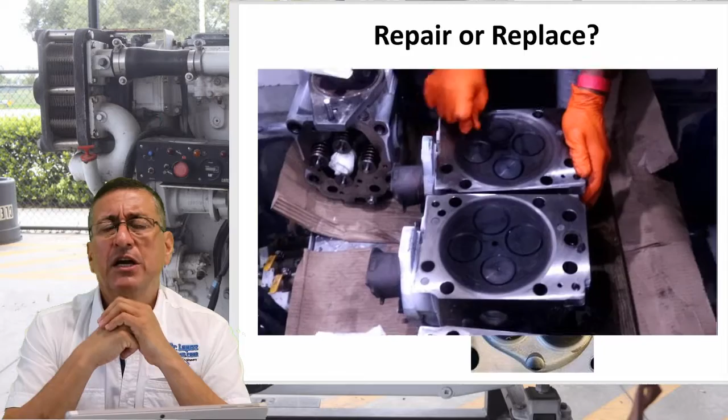Remember, I recommend you remove the head immediately. The first step is take pictures, of course, and then clean the head properly with mineral spirit or any other solvent at high pressure if possible, in order to remove all the grease. After that, check if the head is straight with a metallic ruler.

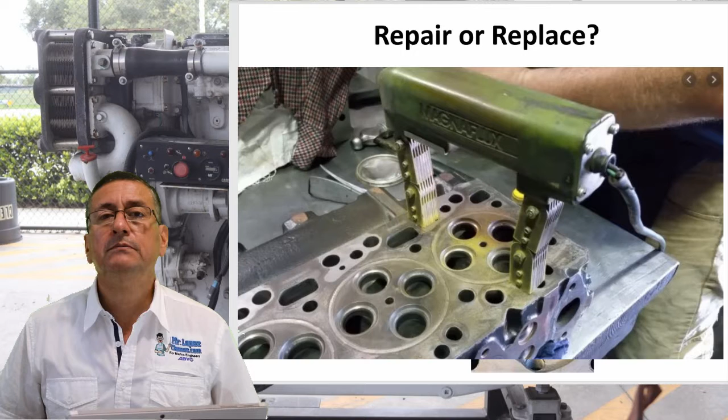After that, check with a liquid penetrant or magnaflux if the head is cracked or broken. If the head is cracked, normally when you send it to the machine shop they explain where the crack is located, and in some cases they recommend repairing the head.

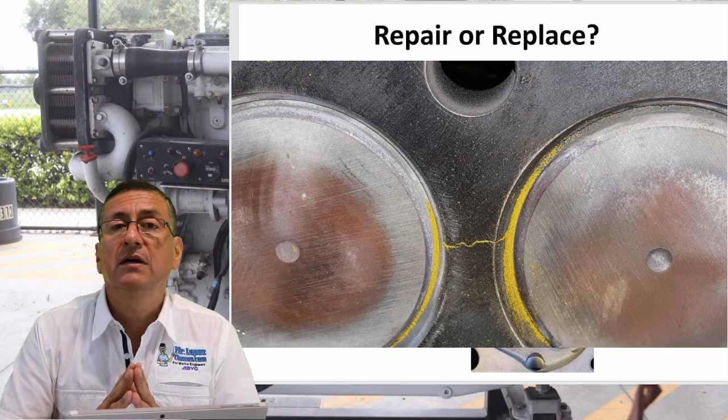In marine applications, according to my experience, I don't recommend repairing heads, especially for diesel engines. I don't recommend repairing heads in any type of engine, gas or diesel, marine application, because at the end of the day it's more expensive. In a couple of months you need to replace the head again. Avoid that inconvenience. Replace the head from the beginning. Don't try to fix the head.

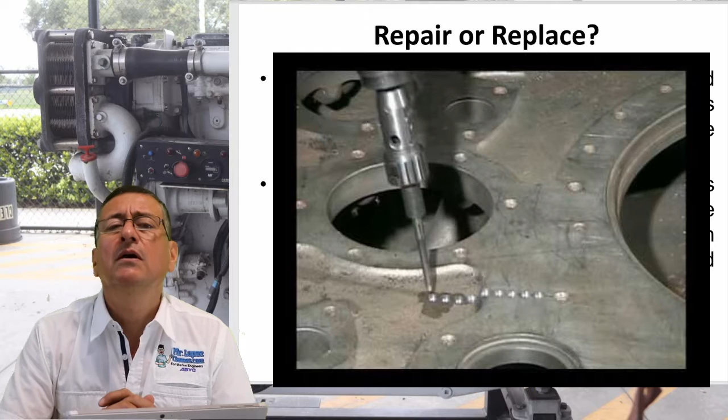There are machine shops specialized in aluminum and steel heads. Yes, I know, and there are special shops with excellent welders with years of experience who can probably fix the heads, especially for older engines where it's practically impossible to buy a new head. If it's impossible, the only option is to try to repair the head. But if it's possible to buy or order a new head, replace it with a new one. Yes, there are companies dedicated to fixing heads.

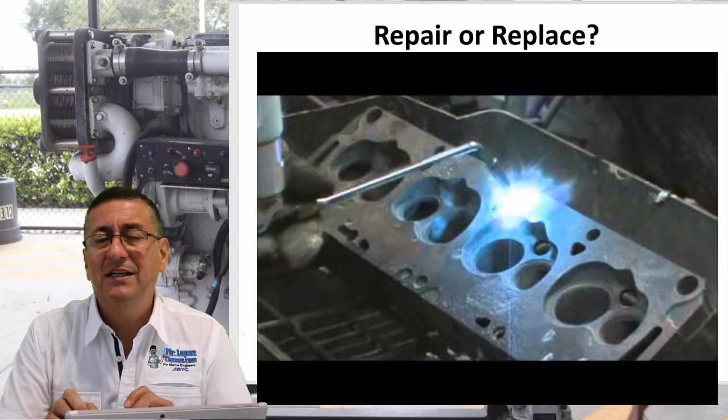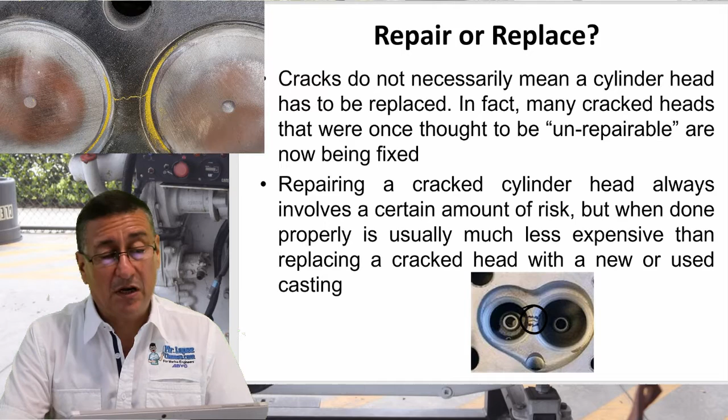Normally the typical crack on the head is located here, in between both valves, the intake and exhaust valves. This is normally due to lack of lubrication and lack of coolant circulating through the head. The head is too sensitive, it's easy to destroy it. All right, but I don't recommend repairing the head.

Cracks in cast iron heads are most often repaired by pinning, but believe me, in marine application this is not recommended. Sooner or later you have a leak. For that reason, I don't recommend it.

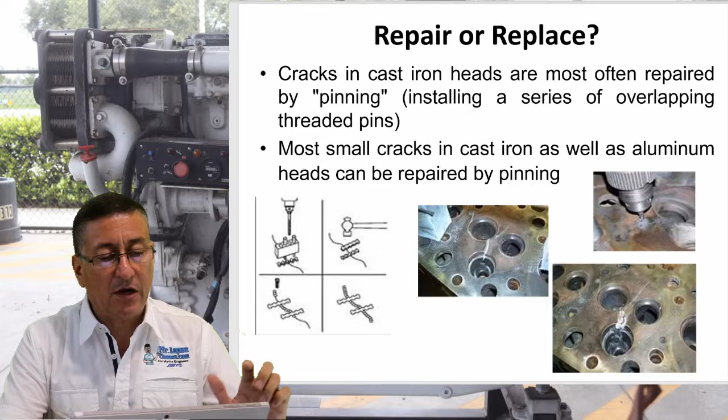Some aluminum heads can be repaired with tungsten inert gas welding. Yeah, it's possible, but I don't recommend it. Only use welding techniques in extreme cases where it's impossible to buy a new part. In the rest of the cases, I don't recommend repairing the heads.

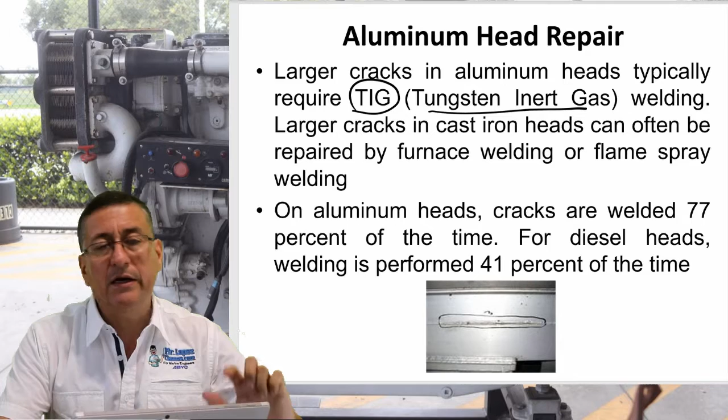Okay, we are going to start right now to verify the head gasket, that important gasket located in between the block and the head. There are different types of head gaskets. This is, in my opinion, the most critical gasket of the engine because it keeps the seal on the combustion chamber.

You remember how much are the temperatures and pressures inside the combustion chamber in a typical diesel engine? A lot of pressure, a lot of temperature. For that reason, the condition of that gasket is important. Once again, never try to repair the head gasket with aftermarket gaskets.

Never, under any condition. This is the first recommendation. The second recommendation: always, always, always, when you remove the head, replace the head gasket, because the head gasket loses integrity, so replace it with a new one. You remove the head, replace the head gasket. Exactly the same with the head bolts - you remove the head, you replace the head bolts. That's my recommendation.

I'm going to explain right now in a couple of minutes why those head bolts should be replaced. Alright, and the head gasket should be original.

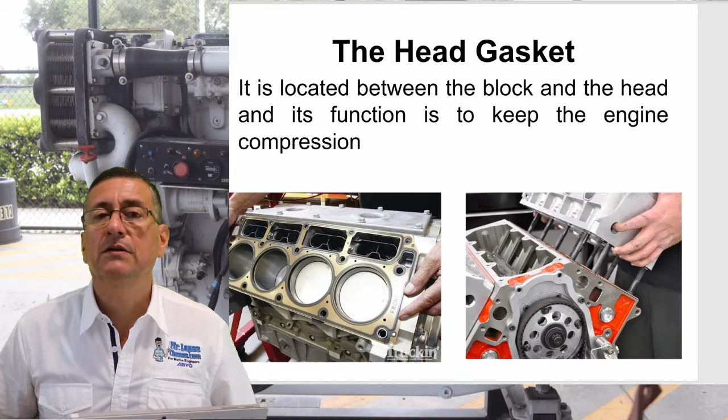Don't forget, this is the recommendation when you cut the head: use a thicker head gasket. The purpose of the head gasket is to seal the cylinders in order to avoid leaks, basically leaks of coolant and leaks of oil.

Before you install the new head gasket, verify that it is exactly the same as the old one. Verify that the holes in the old head gasket match exactly the holes on the new head gasket, and that all the cavities are exactly in the same position as the old head gasket. This is very important.

I have a lot of experience with that. Some years ago I made a couple of mistakes because the head gasket looked practically the same, but one hole was blocked, and I damaged two heads because I put in the new gasket, started the engine, and ten minutes later the head cracked due to high temperature.

When we removed the head the third time and checked the head gasket compared to the old one, we found that one cavity was blocked in the new head gasket, and the coolant never passed through that area. Be careful with that.

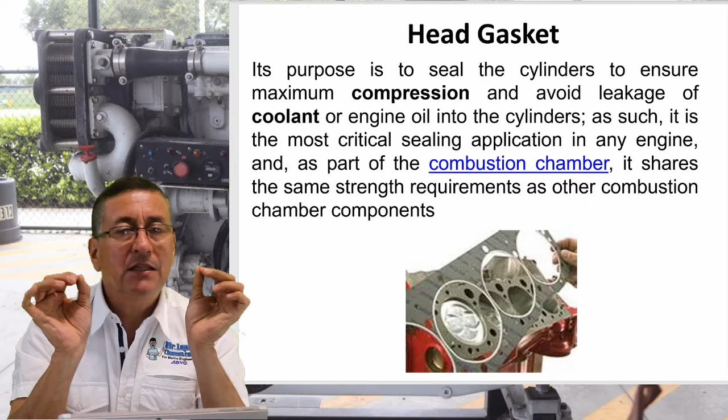You need to check the head gasket not once, not twice, but five times. Check that all the holes align exactly in position, and that all the cavities are exactly in the same position. Before you install the new head gasket, verify where the holes for coolant are and where the holes for oil are.

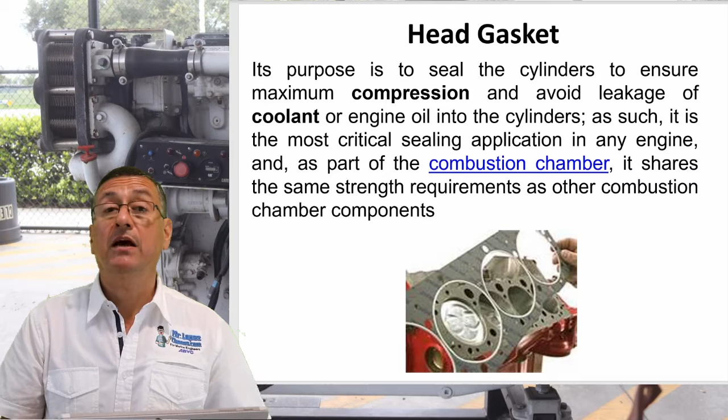Verify that those holes match exactly with the holes on the block and the head. You need to be 100% sure that the dimensions of the holes on the gasket are exactly the same as the dimensions of the holes on the block and the head. If not, the coolant or the oil will not circulate properly. Be careful with that—this is another important recommendation.

There are different types of head gaskets. Today, the most common head gasket is multiple layers—basically like a sandwich. In the middle is a stainless steel layer, cold rolled steel, and on each side is an elastomer.

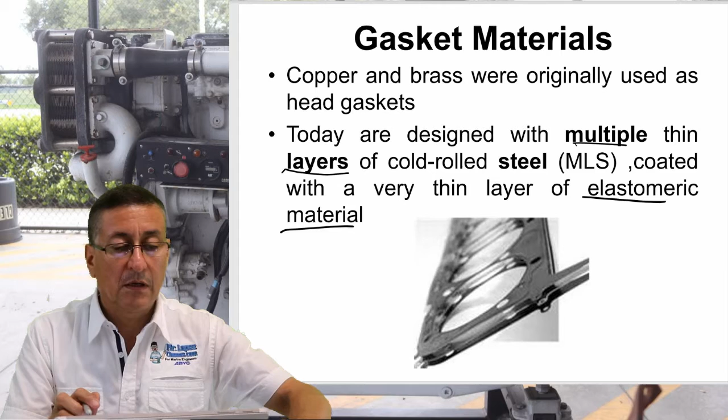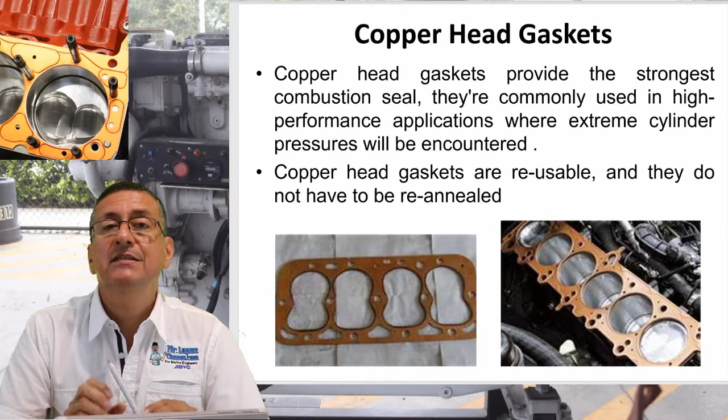Alright, copper head gasket. I love copper head gasket. Those copper head gaskets are unique because they can be reused, up to 2 or maximum 3 times. They're used in engines with higher compression ratio and higher performance.

When you add a new turbocharger to an engine, I recommend replacing the original gasket with a copper gasket. Or when you increase the compression ratio on the cylinders, I also recommend replacing the head gasket with a copper head gasket.

There are companies in the city where you keep your boat - 100% sure if you check the internet you'll find a company dedicated to fabricating custom head gaskets according to the original specification. I love those head gaskets.

Those gaskets seal properly, especially the head gaskets that have O-rings around the holes, like the picture on the screen right now. When you compress the head against the block, the seal is perfect and the coolant never passes through the oil cavities, and the oil never penetrates the coolant cavities. This is 100% good seal in this specific gasket.

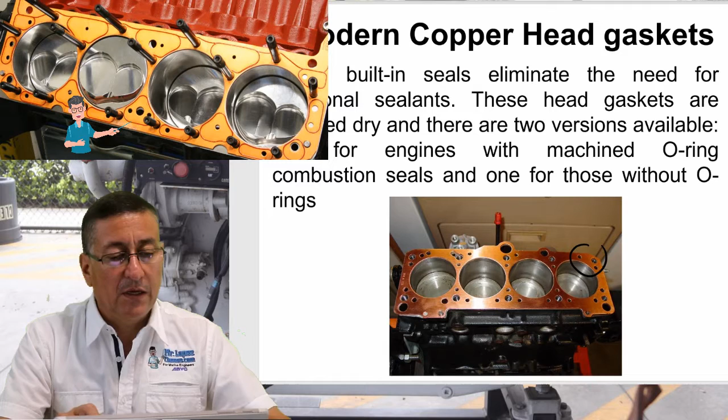Those are the head gaskets, and the graphite gaskets are excellent when your engine works at extreme high temperature. Graphite head gaskets can be used on aluminum heads with iron blocks.

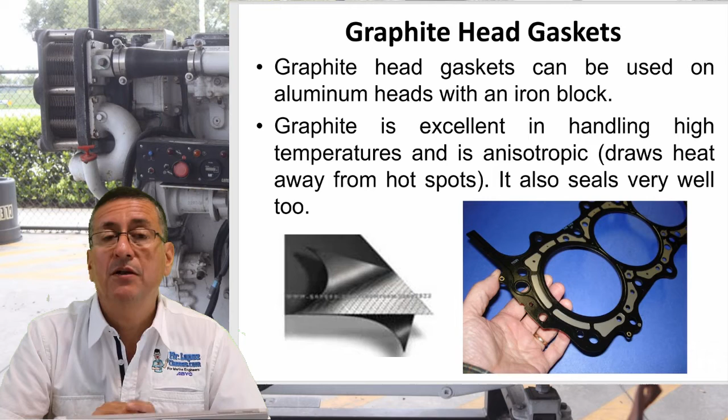There are a couple of manufacturers that have designs of aluminum heads with iron blocks. What do you think about that combination? In my opinion, this is not good, because the thermal expansion of the aluminum is twice that of the iron.

There is a lot of stress on the head gasket in that area, because the aluminum expands twice and the block half. Finally, the bolts get bent. I don't like that design.

The designers that use aluminum heads with iron blocks compensate that situation with graphite head gaskets. Graphite is excellent at handling high temperatures, and its anisotropic properties solve that situation.

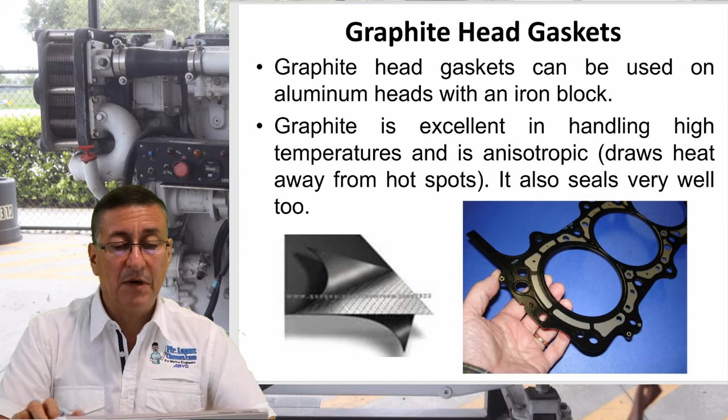I don't recommend it. I recommend iron block with iron head, aluminum head with aluminum block, but don't mix them, because they're different metals with different thermal expansions. Aluminum is lighter than cast iron and expands twice as much - this is the problem.

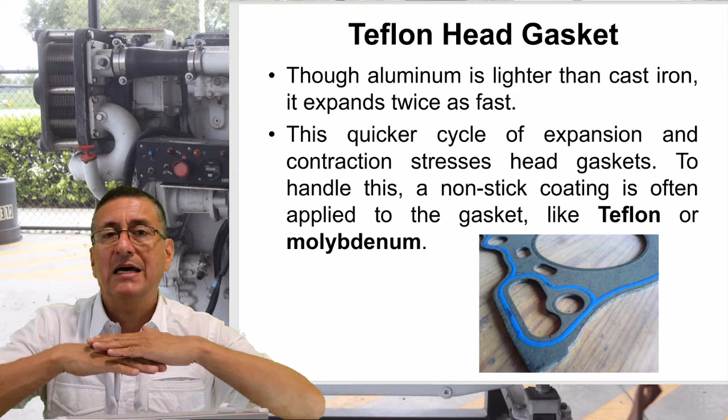The quicker cycle of expansion and contraction stress on the head gasket produces a shear effect on the head bolts. This is not good. The head gasket has Teflon and molybdenum to compensate for that excessive difference between the head and the block.

Other types of head gaskets are Teflon. Teflon is a very common head gasket used today in the majority of gasoline engines with new technologies. They use Teflon - it's a great material.

Alright my friends, right now we are going to check - in general terms, my recommendation is to use the original gasket. It doesn't matter what type of material is used; if it's the original, use the original. Especially in marine applications, my friend, never try to fix an expensive engine with an aftermarket gasket. It's not recommended. It's not good for you, believe me.

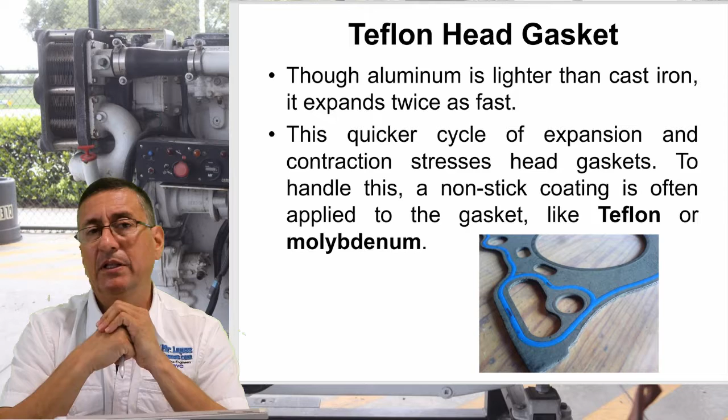Now we are going to check the symptoms when the head gasket is damaged, when the head gasket is broken. It's because the coolant passes to the oil, or the oil passes to the coolant.

The first consequence is that the coolant temperature gauge reads higher than normal. For that reason, you need to be familiar with the position of the needle in your temperature gauge - where it's normally located for each engine. If at one moment the temperature of one of the engines passes the regular position and goes into the red area, you need to stop the engines immediately.

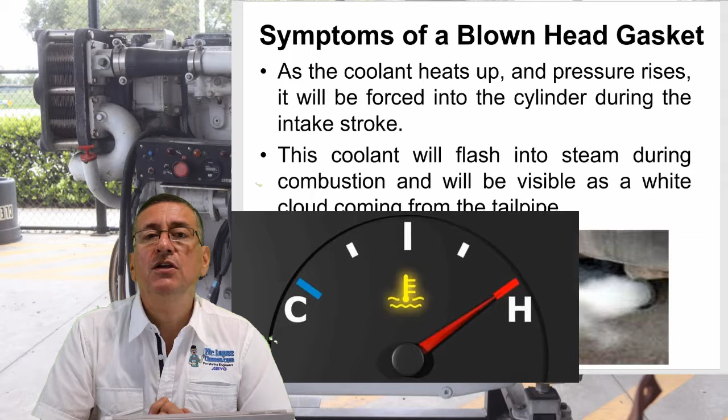You don't say 'I'll run the engine in idle' or 'I'll run the engines only 10 more minutes' - no. If the needle of the temperature gauge moves up even a little, you need to stop immediately and verify different elements that we are going to talk about later. But it's simple: stop the engine immediately, remove the dipstick, and check if the oil is emulsified with coolant.

If the oil is emulsified with coolant, the color of the oil is like a milky oil, and for sure the head gasket is damaged and the head is bent. You need to repair the engine. You need to remove the head and repair the head. This is one of the symptoms.

Other symptom is white smoke going out with vapor. This is coolant entering the combustion chamber. Remember, if salt water enters, you don't have white smoke, the engine stops immediately. If you have white smoke, it's because the coolant is passing into the combustion chamber, and of course you have white smoke. This is one of the consequences.

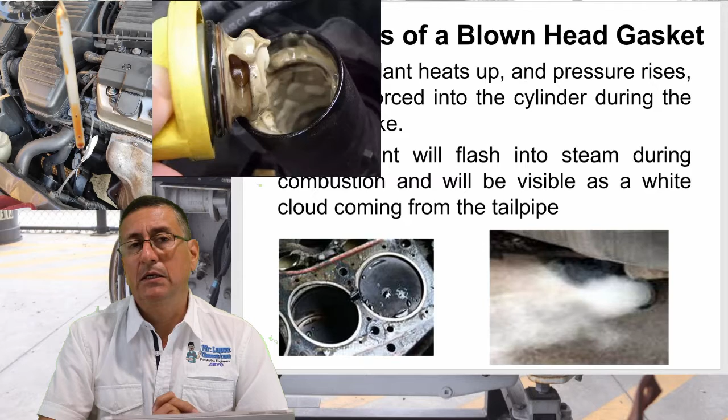Other typical part where you can identify if the oil is mixed with coolant is to check the reservoir you have on the picture, and verify the color. Probably right now the color is not the regular green or orange, the color is like a brown, because the coolant is mixed with oil.

And probably if the engine was running with high temperature, on the radiator cap, the cap of the expansion tank, you have vapor coming out, you have bubbles coming out. This is another indication that the head gasket was blown. This is the typical scenario, the procedure to verify that you have a problem with the head gasket.

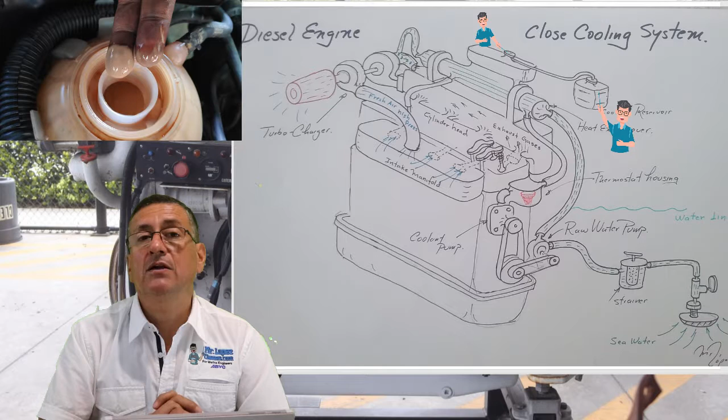Now I need to be 100% sure that the problem is on the head gasket. In order to identify if the problem is on the head gasket, or on the rings, or on the valves, those three situations produce low compression. To identify where is the problem, we are going to do the compression test, and verify in what cylinder is the problem.

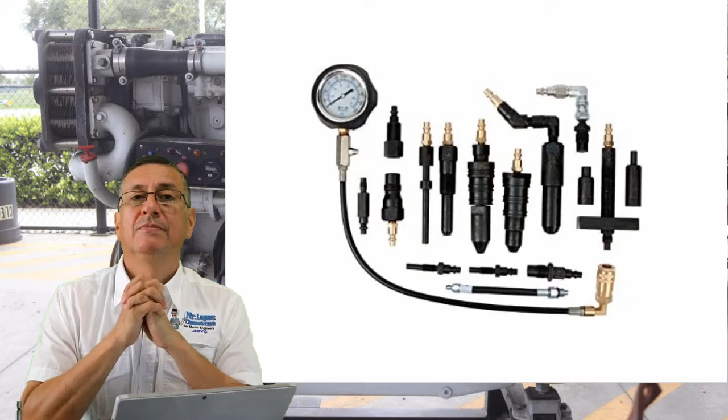In the procedure for the compression test, the most important part, once again, is to check if you have the appropriate manual for that engine. Let me explain something about the procedure to do the compression test in a diesel engine. Verify if you have the appropriate tools, the specific tool in order to do the compression test for that specific engine.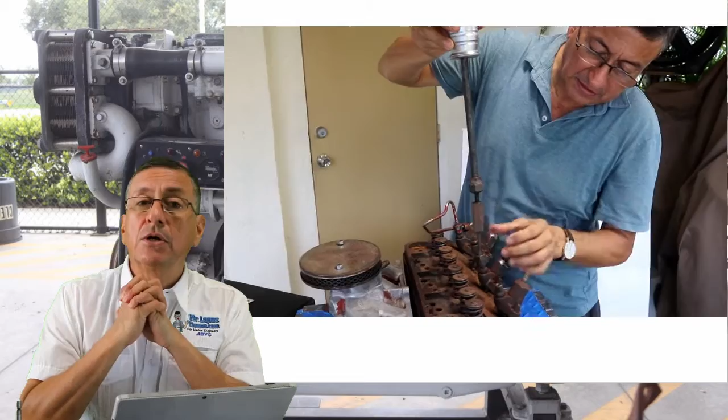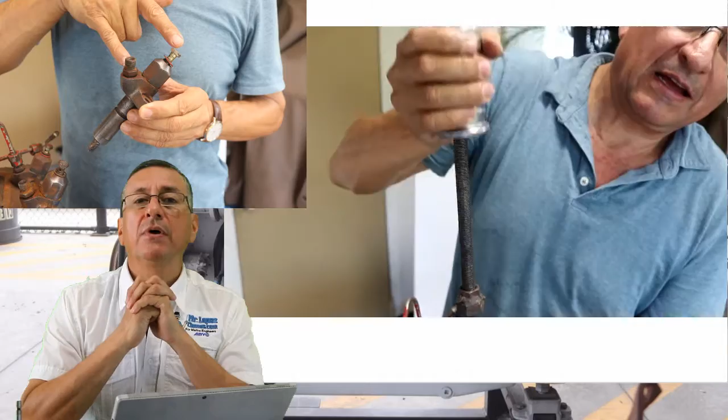In order to do the compression test, we are going to remove the injector. Remember, the injector normally has on one side the input of the fuel and the return on top. The return of the fuel, 80% of the fuel, returns on top into the fuel tank. The input is on the side of the injector, 100% of the fuel enters there, and 80% returns on top into the fuel tank.

You need to disconnect carefully the input and the return using the appropriate wrench. And right now you can remove the bolt. Normally one bolt keeps the injector against the block, against the head.

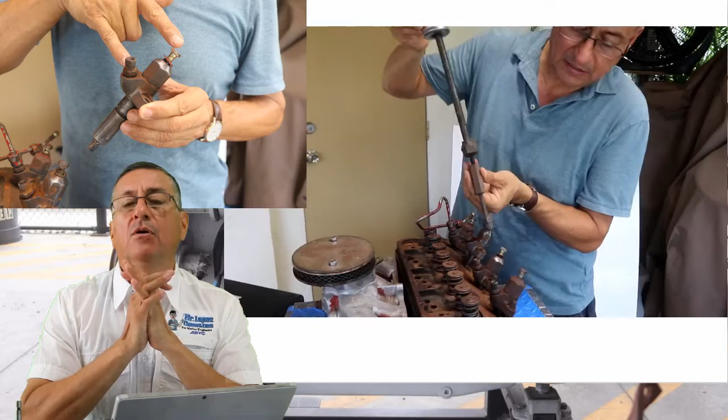Right now you need to verify if you have the appropriate tool to remove the injector, because normally those injectors are completely seized, completely like welded with the head. Removing the injector is not easy.

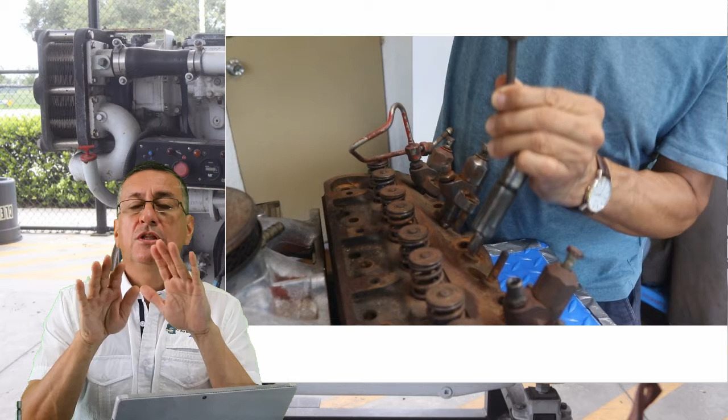In general, you need to use appropriate tools recommended by the manufacturer to remove the injectors. Don't try to remove the injectors with a hammer or with vice grips. Never try to apply the torch, never try to apply heat on the injector, because you destroy the O-rings, you destroy the internal elements on the injector. You damage the injectors. If you use the torch, you destroy the injectors. Never try to use the torch.

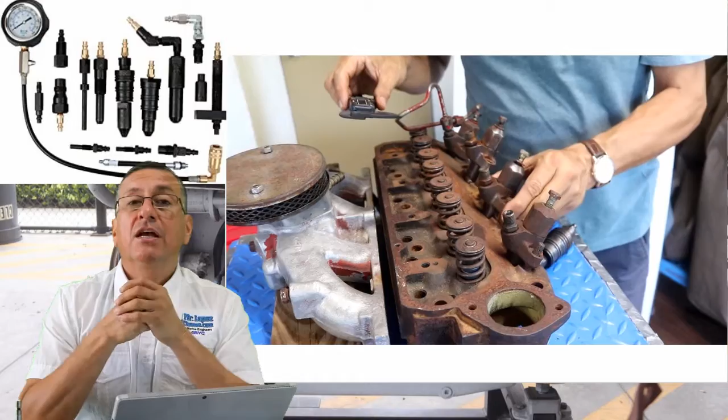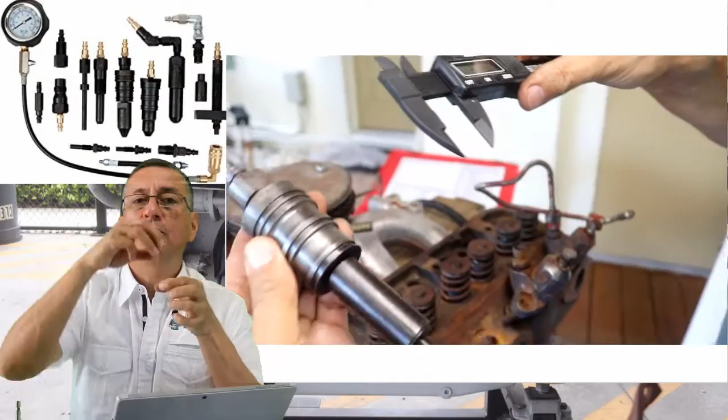You need to be 100% sure that you have the set with the tools, the sockets appropriate to remove the injectors, and replace the injector with the appropriate tool, with the same external diameter in order to fill exactly the same hole that the injector occupied. You remove the injector and introduce the tool in the same hole, and that tool, on one end, is connected with the pressure gauge.

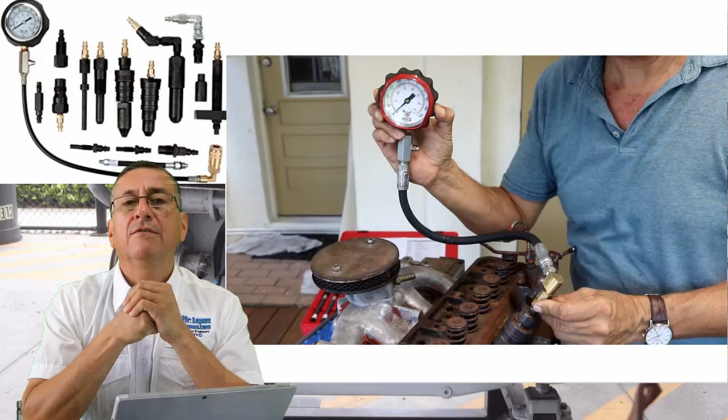The pressure gauge is connected on the tool, and the tool should be attached to the head by bolt or by pressure. There are different types of tools. If you have that tool and the appropriate pressure gauge, you can do the test procedure. If not, never try to do the compression test if you don't have the appropriate tool to remove the injectors and the appropriate tool to replace the injector and connect the pressure gauge. This is the most important part.

And this is the most difficult part. The most difficult part is to remove the injectors and install the tool appropriate for that specific engine. If you have the set with the tools, you can replace the injector for one of those elements on the set, and you can connect the pressure gauge.

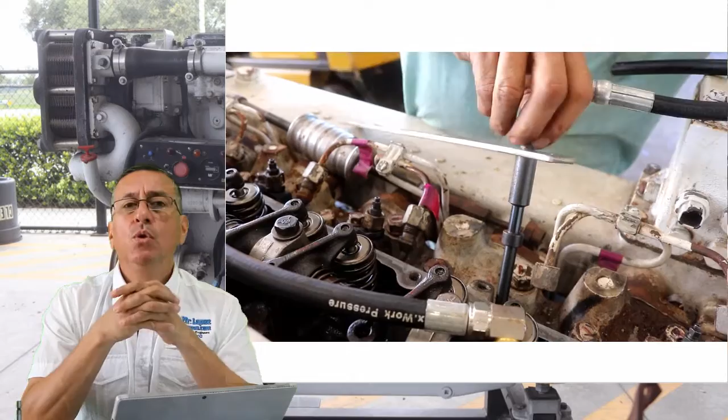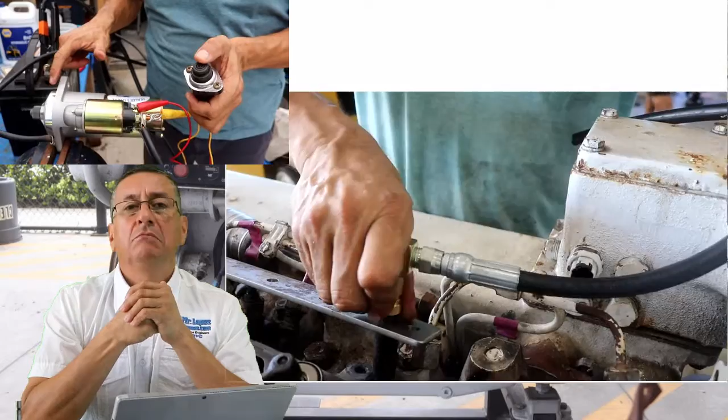Right now we are going to follow this procedure, cylinder by cylinder. When the tool is inserted into the hole where the injector was located before, we are going to fix that tool properly, and right now we are going to crank the engine 4 or 5 times until the pressure reaches the maximum pressure recommended by the manufacturer in the manual.

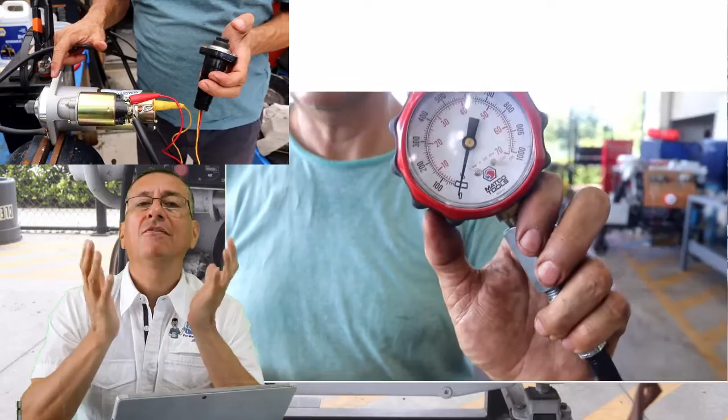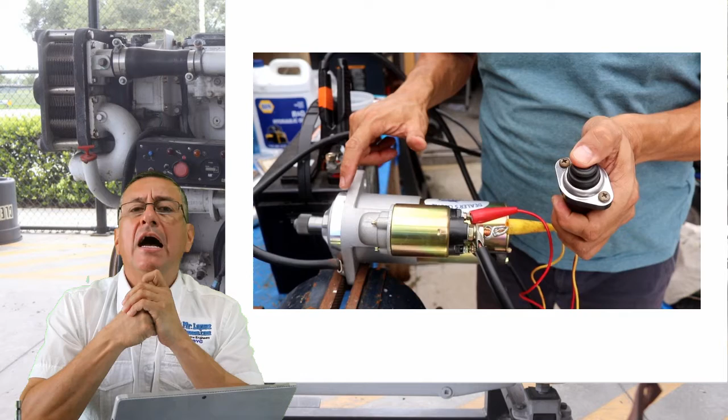Once again, if you don't have the manual, don't try to do that procedure. In the manual, the manufacturer recommends the pressure that you have on the screen right now. This is the pressure recommended for that specific injector. Right now, we are going to crank the engine 1, 2, 3, 4, 5 times until the pressure reaches the pressure recommended by the manufacturer.

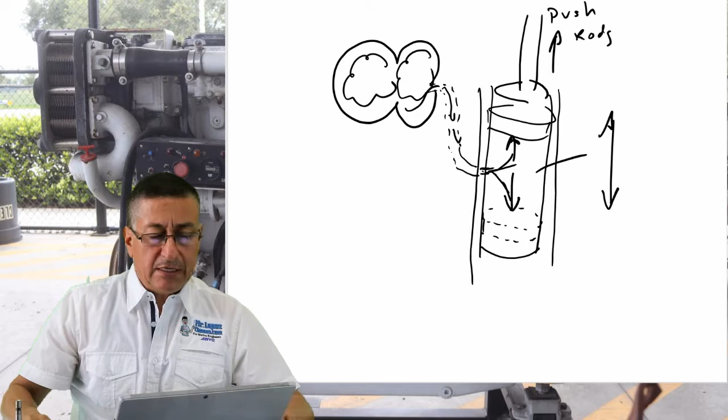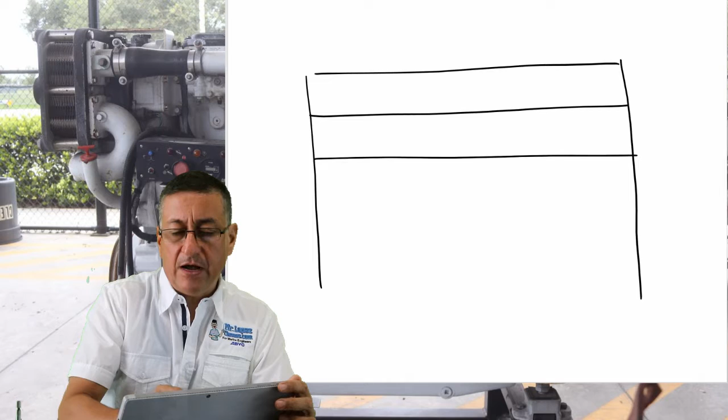And we are going to create a table like this. Suppose we are going to put a small example here, and we are going to verify. We are going to put cylinder 1, cylinder 2, cylinder 3, and cylinder 4. Suppose that the engine has 4 cylinders. It's exactly the same for 6 cylinders, 8 cylinders, 10 cylinders. It's exactly the same, and we are going to check.

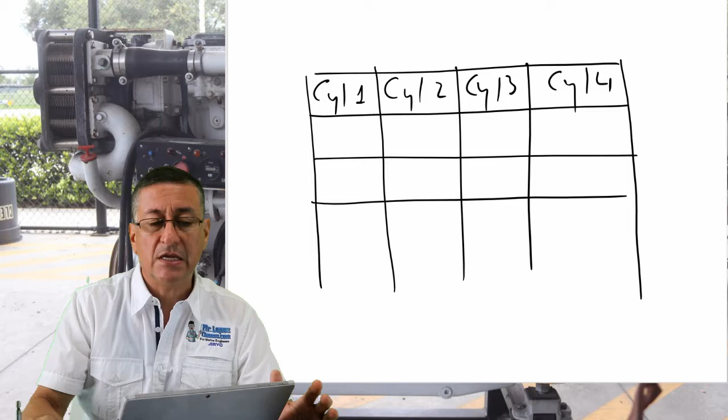Suppose that the pressure recommended by the manufacturer should be around 600 psi. It's an example. And we are going to check. We are going to do 2 attempts. This is attempt number 1, and this is the second one.

In the first attempt, cylinder number 1 has 550, and in the second attempt, 560. Cylinder number 2 is 400 and 380 psi. Cylinder number 3 is 400 and 350. And cylinder number 4 is 600 and 620.

This is an example, a typical example. What happened in that particular engine? What happened in cylinder number 2 and cylinder number 3? Those two cylinders are below the pressure recommended by the manufacturer. The compression in those 2 cylinders is lower than the pressure recommended.

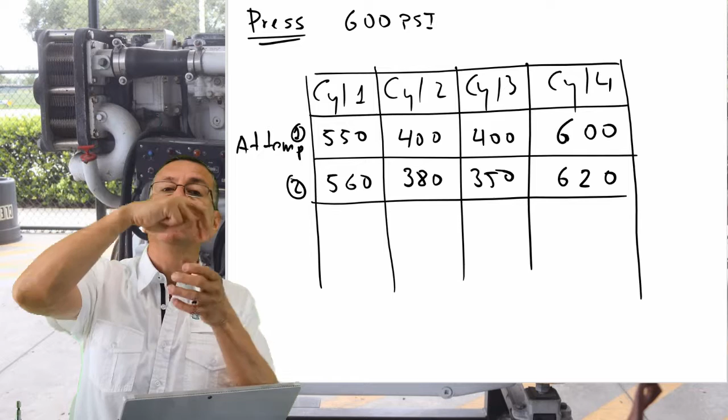Now we need to identify if the problem in those cylinders is because the rings are broken or worn, or because the valves don't close properly, or because the head gasket is damaged and there is a leak. In other words, we are going to verify if the leak is through the piston rings, through the valves when they don't close properly, or through the gasket between the block and the head. We have 3 possibilities: rings, valves, or head gasket.

How can we identify where the problem is? It's simple. In this particular example, we have 2 cylinders with problems, and we need to identify if the problem is in the rings, the valves, or the gasket. Let me explain something.

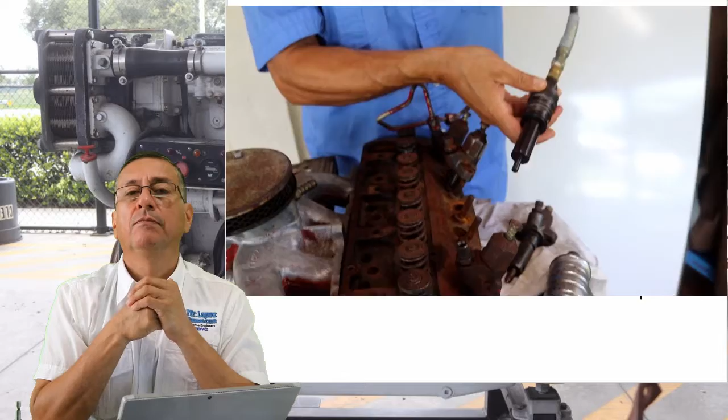Suppose that, like this, I have 1 cylinder with low compression. I am going to remove the compression test element, and we are going to add a small amount of engine oil, the same oil that you use regularly in that engine. And we are going to introduce about 0.5 ounce of oil.

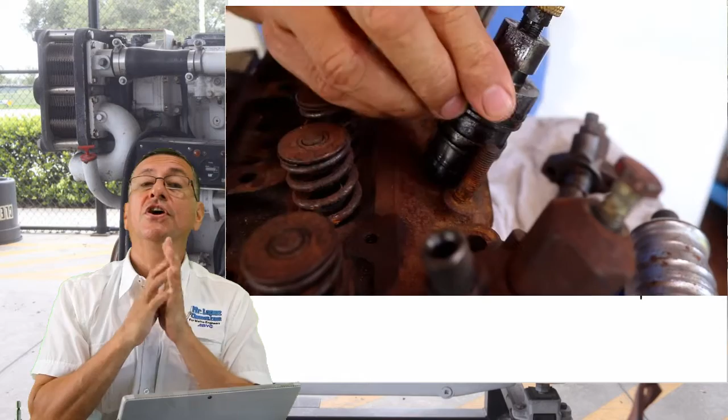What is the function of the oil? The oil goes into the head of the piston and seals the gap between the cylinder and the piston head.

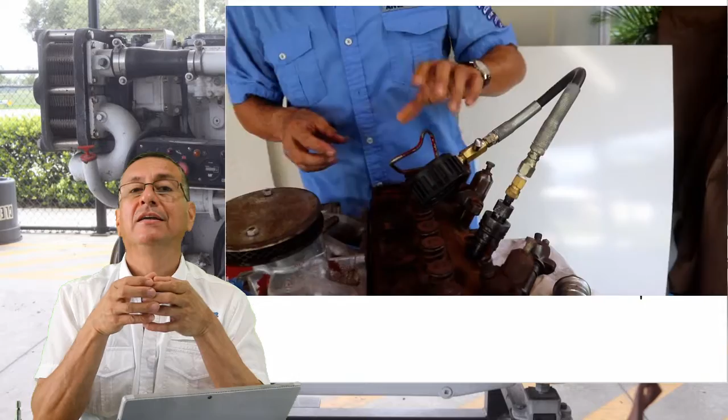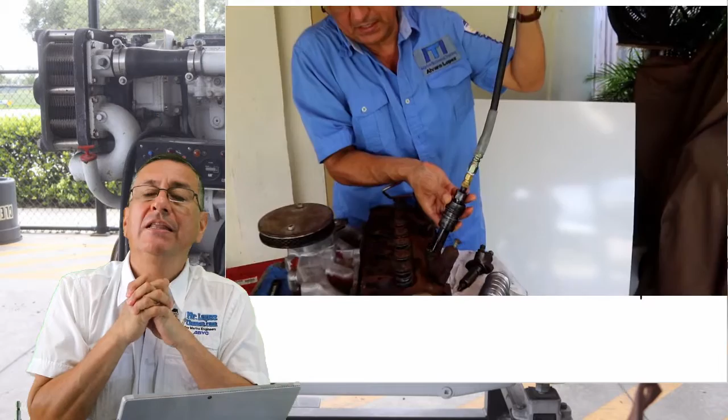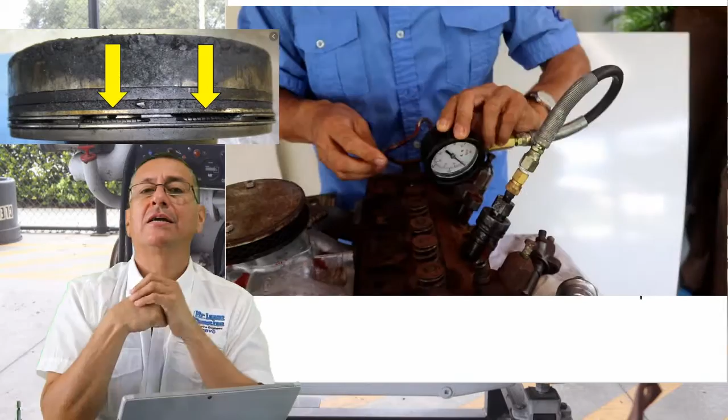Now we are going to install the compression tester again and crank the engine. We verify the compression right now is 650, the compression increased. Where is the problem located in that cylinder? On the piston rings, because the oil sealed the gap between the cylinder and the piston head with oil, and the compression increased. I am 100% sure that cylinder has a problem with the piston rings.

We need to replace the piston rings, or we need to hone the cylinder. This is the next project, and we are going to replace the piston rings.

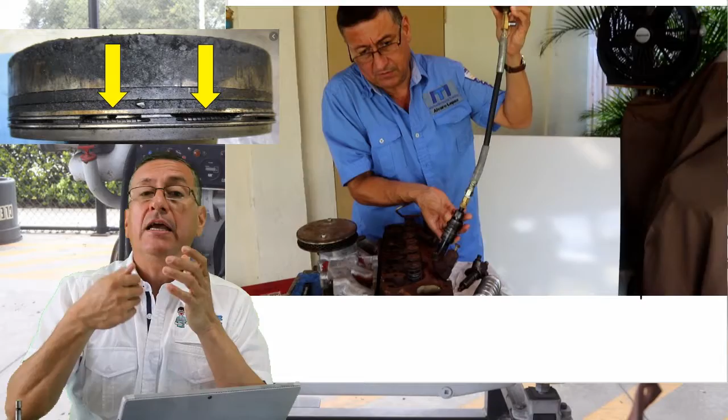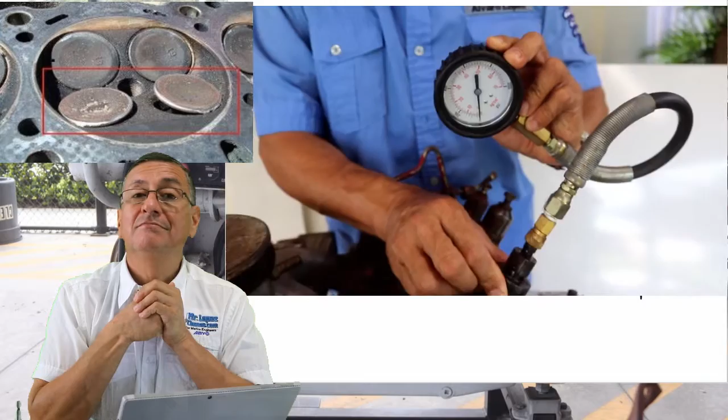What happens if I add oil into the hole and connect my compression tester again, crank the engine 5 times and the compression stays low, 350, 380? The problem is on the valves. One valve stays open, or one valve is cracked, or one valve was melted, or one valve stays open all the time because the spring is broken. The problem is on the head.

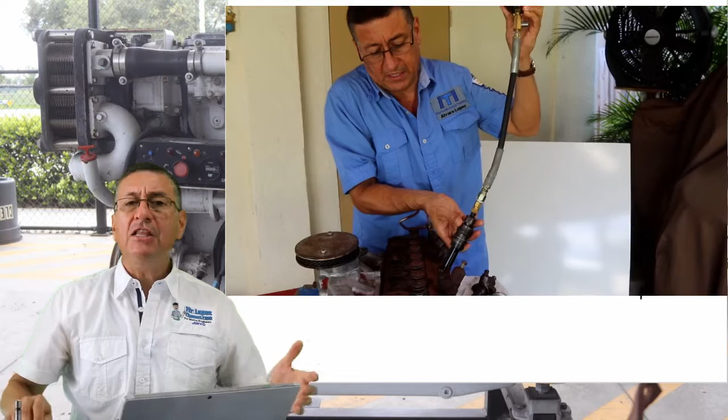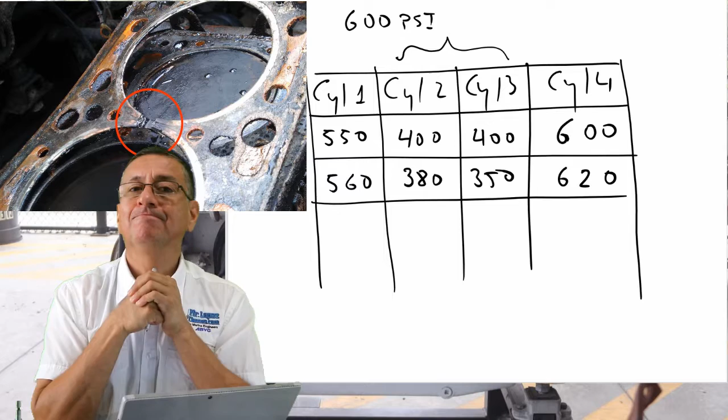Or what happened in this particular example? I have 2 consecutive cylinders with low compression. This is a perfect indication that the problem is on the head gasket. When you have 2 or 3 consecutive cylinders with low compression, it's because the head gasket is blown, because the engine was overheating, the head was bent, and the head gasket was leaking, and the oil passed into the coolant.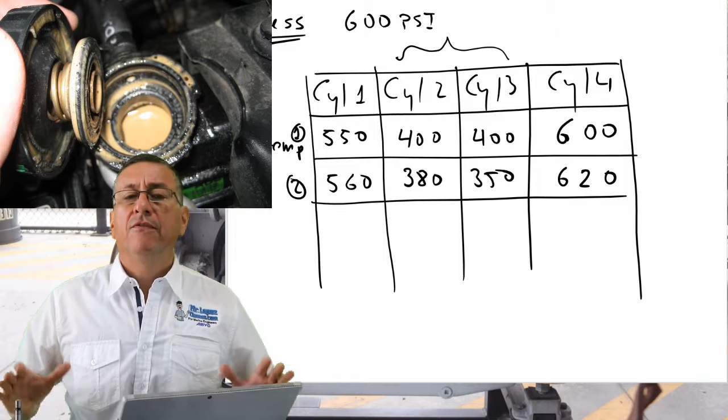Okay, we are going to summarize the information. In order to do the compression test, the first step is to keep the manual appropriate according to the serial number and model of the engine. The second is to be 100% sure you have the appropriate tools to remove the injectors and install the new tools, and verify the tools are appropriate according to the diameter of the hole on the head.

Now install the appropriate tools, install the pressure gauge, crank the engine 4 or 5 times, and verify the maximum pressure on the gauge. Copy that number in the table and repeat the procedure one more time per cylinder, in other words 2 times per cylinder. Copy all the information in the table, and after that analyze the situation.

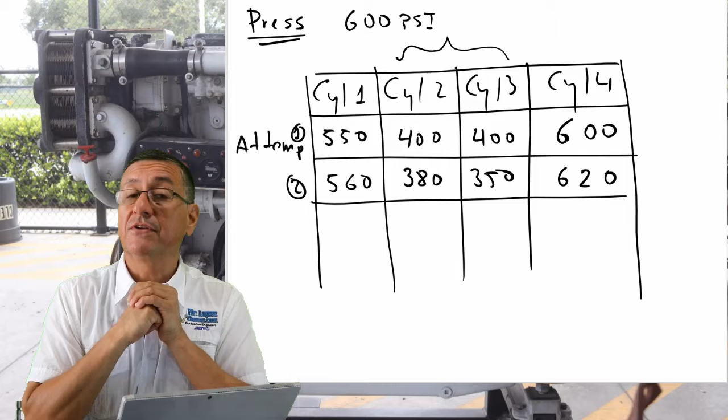I have low compression in only 1 cylinder. Let me check if the problem is on the valves, the rings, or the head gasket. Let me add a small amount of motor oil, install the compression tester again, and crank the engine. The compression increased dramatically, so the problem is on the rings.

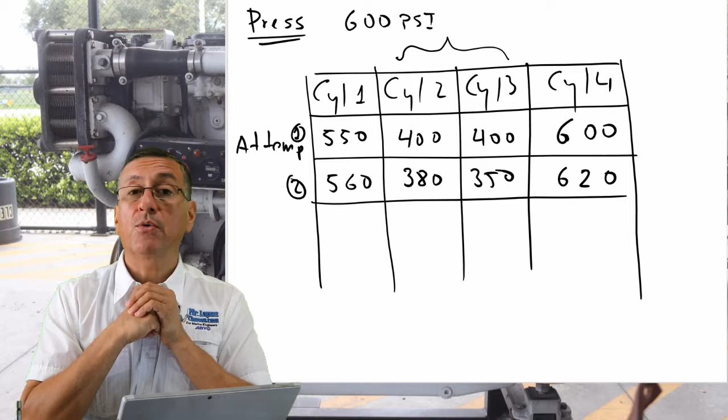I added the oil and cranked again, and the compression stayed low, low, low. The problem is on the valves.

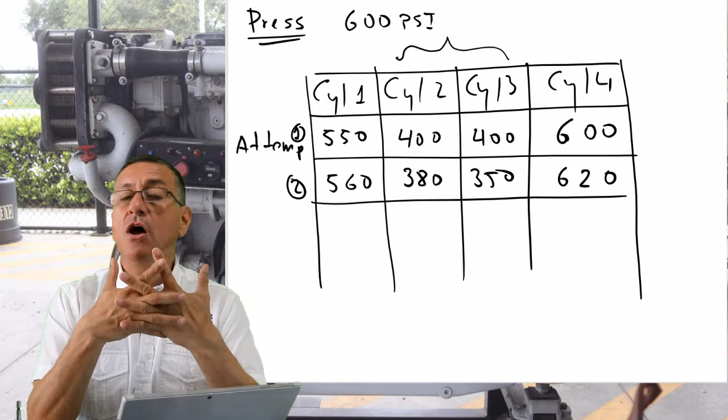If I have low compression in 2 or 3 adjacent cylinders, this is a typical problem of the head gasket. The head gasket is blown for some reason. We need to remove the head, send it to the machine shop to cut the head and replace the head gasket, then try to start the engine again and verify if the problem was solved.

Okay my friends, this is the procedure to calibrate the valves, and this is the procedure to do the compression test in a typical diesel engine.

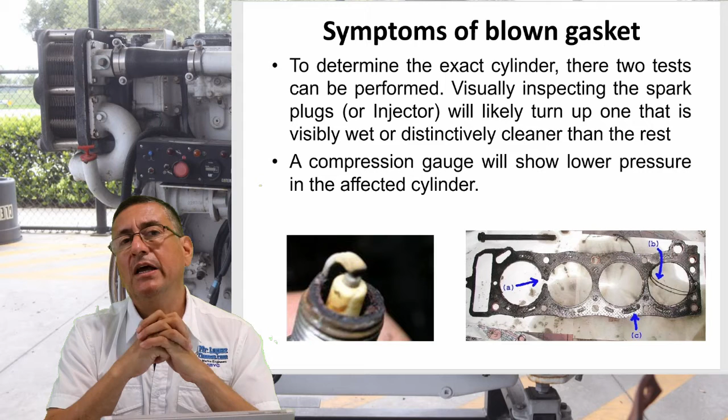Okay, and finally, after the compression test, we are going to put the head back and torque it properly. Once again, we are going to torque the head.

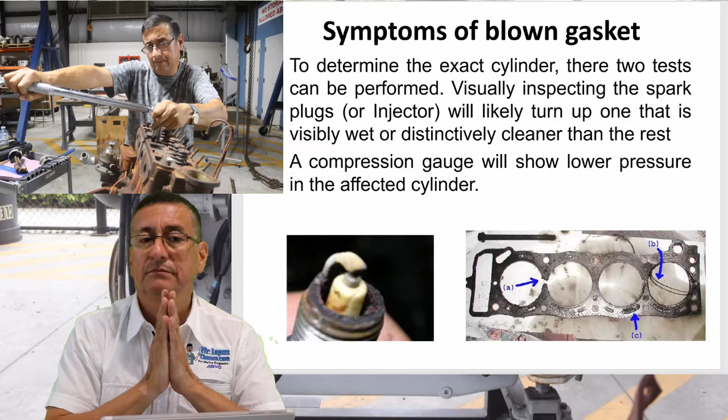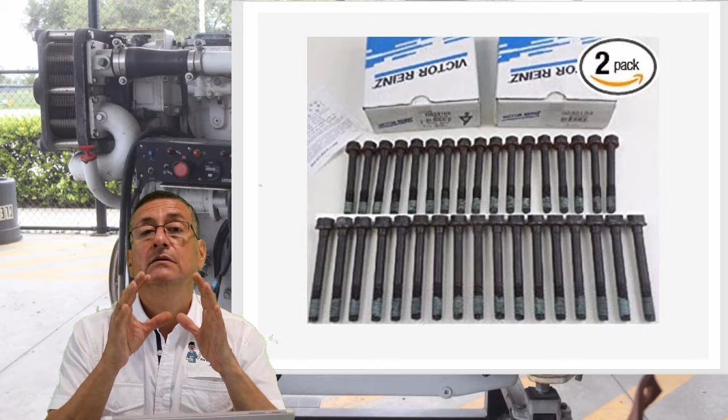First question, do you have the service manual? That's the most important part. With the service manual, check what page has the torque specifications specific for the head, and verify what type of head bolts you have, whether you need 12-point sockets, 6-point sockets, or Allen sockets. Verify what type of socket is recommended for those specific head bolts, and verify if you have the torque wrench.

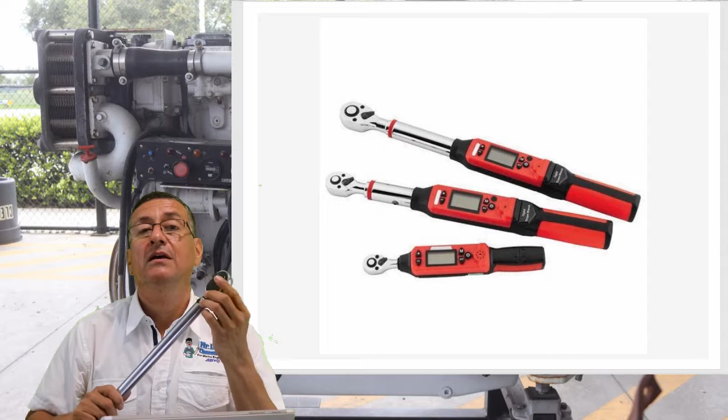Normally for diesel engines you need half inch, 3/8 is not enough. Verify that you have the sockets, verify that you have the torque wrench. You can use any type of torque wrench, click or digital. Both of them are accurate. I recommend both of them.

Try to use a good brand. Believe me, if you use cheaper torque wrenches, you get different measurements. Alright, other important recommendations.

Try to replace the bolts for original bolts, new ones. Can I replace a couple of bolts instead of all the head bolts? Use standard bolts, but 2 of those bolts are broken. Can I replace only 2 of those bolts? Can I replace those 2 bolts with standard ones if the rest of the bolts are metric? No. You need to replace all of them, and use exactly the original specification. If the originals are standard bolts, use standard. If the originals are metric, replace with metric. Never try to mix it.

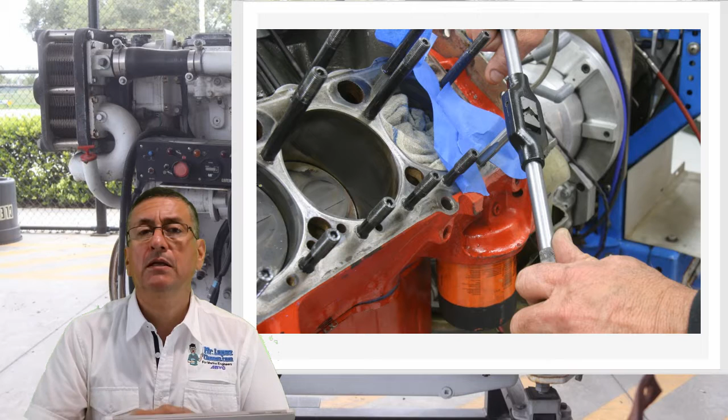That's the most important thing. If for some reason it's not possible to find the original bolts, for example standard, and you found similar metric bolts, yes, you can replace all of them with metric, but I recommend trying to repair the threads first, passing a new tap in order to be 100% sure that the threads are exactly the same as the bolts that you have.

The procedure is simple, I explained it in our introduction class. You need to select the tap appropriate according to the type of threads on the head bolts, and rectify the threads. This is very important.

Be careful, check the specifications, check the procedure recommended by the manufacturer in order to apply the appropriate torque. There are manufacturers that use 1 step, 2 steps, or 3 steps for the procedure. Follow the recommendations of the manufacturer specific to the number of steps or the procedure to apply the torque.

Normally when I don't have the information, if I'm working in the middle of the ocean and only know the maximum torque, I use that spiral recommendation, or in zigzag, like other manufacturers recommend. The spiral recommendation is good - you start in the middle and follow the spiral path until you finish on the side of the head.

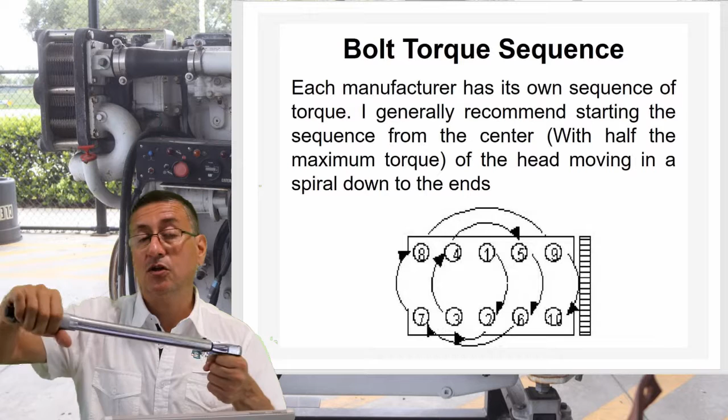This is my recommendation. Some manufacturers recommend the torque with the torque wrench, and after that, with the angle tool, apply 90 degrees additionally or 120 degrees additionally. For that reason, I recommend following the torque recommendation of the manufacturer.

The service manual is mandatory. If you don't have the service manual, don't try to do any type of repair. If you have the service manual, you follow the recommendations and you won't have any problem. The friend of mine is the service manual. Alright, this is the procedure.

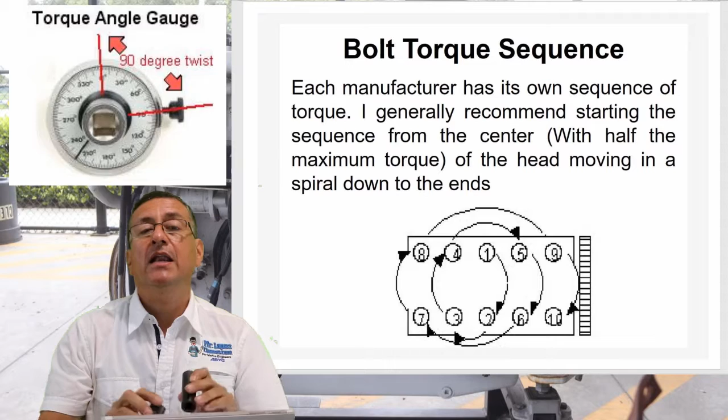Don't use extensions when you apply the torque. Use impact tool sockets, and never use extensions, because if you use extensions, you modify the recommended torque. In some situations, it's not possible to access the bolt without an extension. I recommend, if you use an extension, add 10% additional torque to the recommended torque.

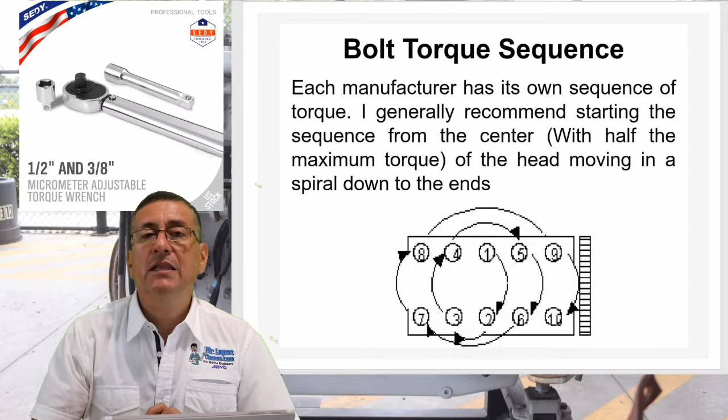Never reuse old bolts. Replace the bolts with new ones, and install the bolts dry, not wet. Never impregnate the bolts with oil. Install the bolts dry, why? Because if you apply oil on the threads, with the vibration of the engine, the bolts will become loose within a couple of years. I don't recommend using oil, I prefer that you install the bolts dry. Alright, this is the final episode of chapter 5.